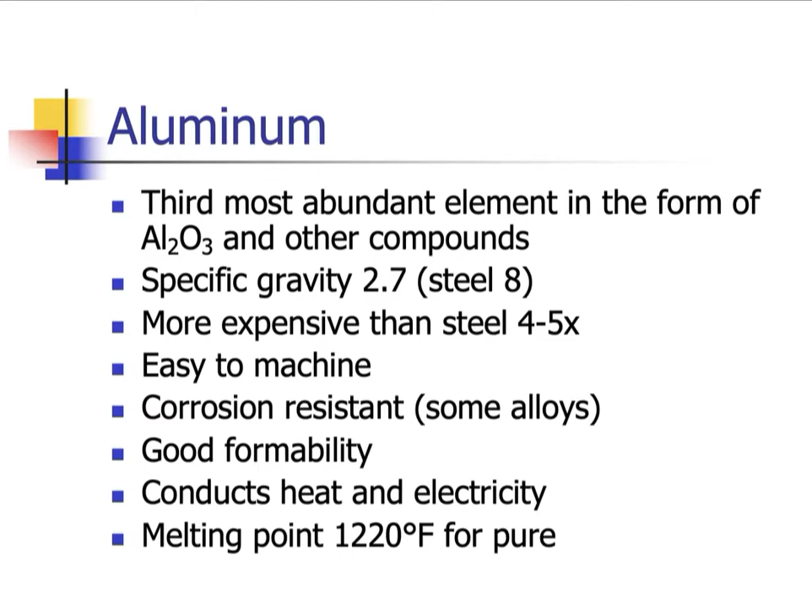Aluminum has good formability, or relatively good formability, conducts heat and electricity, and its melting point is about 1220 for pure aluminum. When we're making castings, the aluminum we have in the lab, alloy 356, I believe becomes completely liquid at about 1050 degrees Fahrenheit. So it has a relatively low melting temperature compared to steel and cast irons. Steel typically pours at 2800 or so Fahrenheit, and cast irons maybe about 2300, 2400, 2500 Fahrenheit.

Okay, so let's move on. How do we get aluminum out of its ore? I'm not going to test you on the exact process, but this process is where we take the ore and purify it to pure alumina. Bauxite is the ore, and alumina is the thing we're after, because we need pure aluminum oxide for the next step, which we'll talk about in a minute.

Bauxite ore comes from Jamaica, and if you've watched one of the old James Bond movies with Sean Connery, Dr. No, they're running around in a bauxite processing facility. Oregon, Washington, Arkansas, and Australia also have lots of it. But basically we need to get it from the ground.

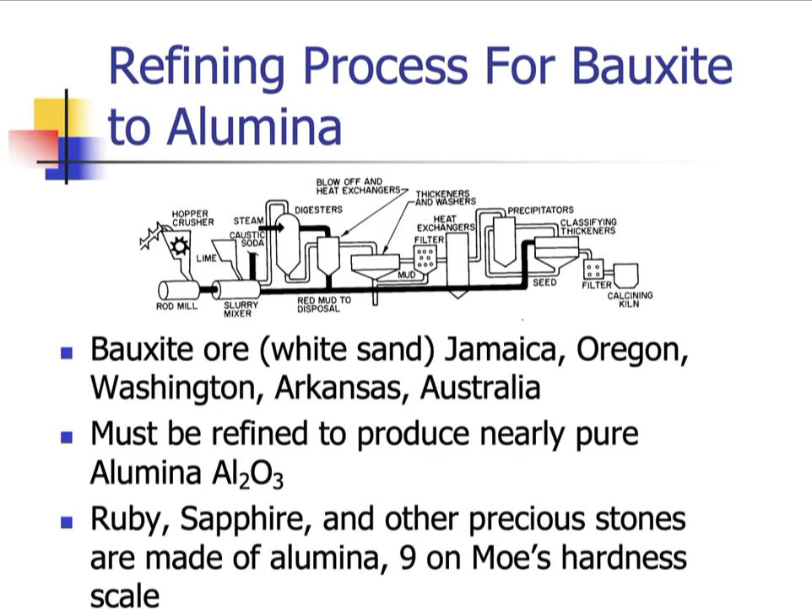One thing you may not know is that precious stones like rubies and sapphires are made out of aluminum oxide, crystalline aluminum oxide, which is 9 on the Mohs hardness scale, with 10 being diamond. So a lot of times we use aluminum oxide for sandpaper and grinding stuff, like grinding wheels.

Okay, so how do we get from alumina with an A on the end to aluminum metal? What we need to do is steal the oxygen from the aluminum. If you see here, Al2O3, we need to steal away that oxygen. So how do we do that? The problem is that aluminum oxide is one of the most stable compounds, and so in order to steal the oxygen away from it, it takes a lot of energy, and it actually took a special process.

What's kind of interesting is that Napoleon was very wealthy, and when he was in power, he had aluminum tableware. The reason was that at that point, aluminum was the most expensive metal on the planet. So back then, they didn't have the process they have now to make aluminum from alumina.

Now we have a mass production process, but it still takes a ton of energy. Not really a ton, but okay. So what do we do? If we look carefully here, we have alumina powder being added to this big furnace. I'll put a link to some videos on this process in this assignment here.

So what we're going to do is pass a current through this liquid, which is a salt. Imagine table salt, the solid white stuff you have on the table - that's sodium chloride. Aluminum fluoride is a salt called cryolite - it's sodium aluminum fluoride. So sodium aluminum fluoride is a salt.

You take that and you heat it up until it melts. Now this is above the melting temperature of aluminum, and it stays liquid because this process creates heat. But we have these things called Hall cells. Well, why do we call them Hall cells? Because a person named Hall was the American person that invented this.

Now there's another guy named Héroult over in France that invented it at the same time. So they call this the Hall-Héroult process, which over here we call it the Hall process because we don't want to give the French any kind of credit for it.

So we have the carbon anode, the positive. It reacts with the alumina and the molten cryolite. Essentially what goes on here is the cryolite is a catalyst to the reaction, and that was the key, that this molten cryolite was in there. For some reason, it will allow the alumina, the oxygen in alumina, to combine with the carbon on this anode, and it makes carbon dioxide.

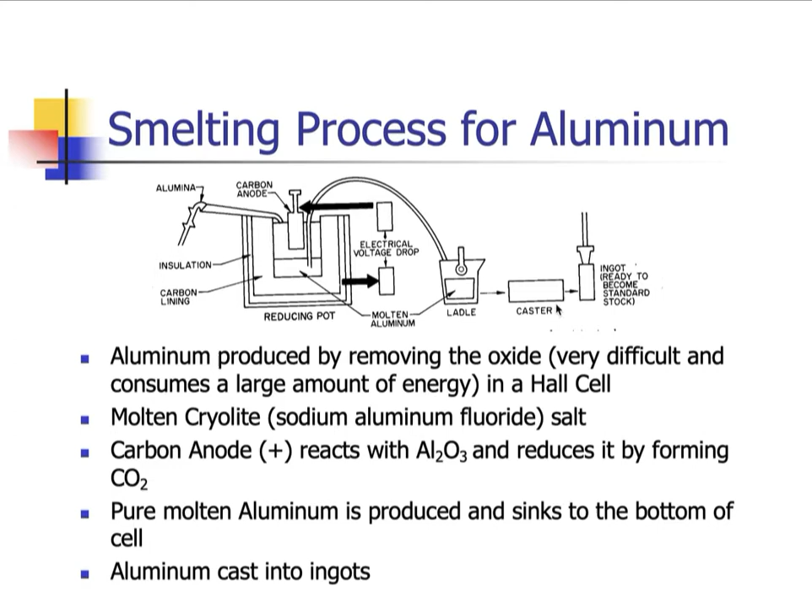Okay, so let's talk about what happens after this now. So now we have an ingot - we've cast it into an ingot of some sort in this casting machine, and we'll see that in the video as well. So what happens now? This is called, sometimes they call it virgin metal or virgin aluminum, where it doesn't have any impurities in it yet.

So when we're recycling metals, the big risk is that the recycled materials you're bringing in are not of the same composition as what you want. So that's a problem - how do we get around that? Well, we sort really well at the junkyard. When you take aluminum into the junkyard, that's why the person there is real picky about what you have in your bucket - it needs to be all the same type of material, or they'll sort it out, or call it mixed and sort it out later on.

So we don't want contaminants. A contaminant might be - if we're trying to make the 356 alloy that we use in our casting portion of this class, that has some silicon and some magnesium in it, very specific amounts. If we have some copper contamination, or too much magnesium, or manganese, or some other element in there that's detrimental - iron is a big one. If you had a bunch of iron in there, it will make the mechanical properties much lower than they would normally be.

So most of the time we're interested in making sure we have a high strength material. So the virgin material goes in, and that can dilute out some of those non-desirable elements.

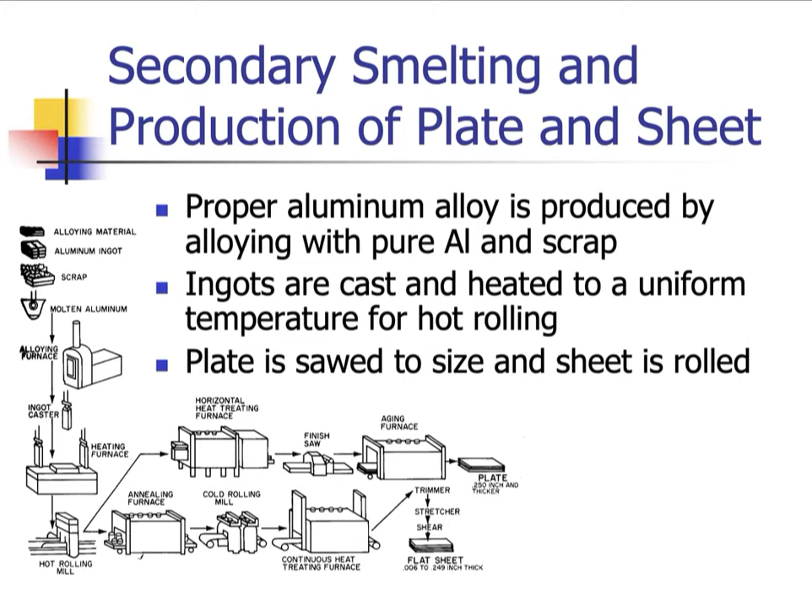So we have aluminum alloys being produced in a furnace. The ingots are cast, heated uniformly, and then rolled hot, and then we take it down to whatever dimensions we need at that point. This is mostly for flat product, for flat plate and sheet. If we're trying to make other shapes, again, we'll usually make them by extrusion.

Okay, so how do we designate aluminum alloys? You may have had some experience with this before. If you're into cars or something like that, you might see that a really high-end part might be a 6000 series, like 6061 or something like that. Each one of these alloy designations would be either for pure aluminum, copper, manganese, silicon — all these different alloying elements are the primary alloying elements. Now, as we go up this list, the 7000 series is the strongest, okay?

But these are used for different things. The 3000 series would be like your diamond plate, the real shiny stuff that you weld bumpers out of, or really nice toolboxes. The 2000 series is very strong, but it's not very corrosion resistant. We don't use it much anymore.

Like the old World War II airplanes, these were usually a 2000 series. But if we have some real high strength applications, we might put this 2000 series in there. We just got to make sure that we keep it from corroding in different ways.

If I'm making wires to conduct electricity, or maybe I want to make a heat exchanger, I might make it out of a 1000 series, which is nearly pure aluminum. And then 4000 I don't see much. The 5000 series is usually stuff for like shipbuilding. So if you're going to make a hull out of an alloy, it might be a 5000 series.

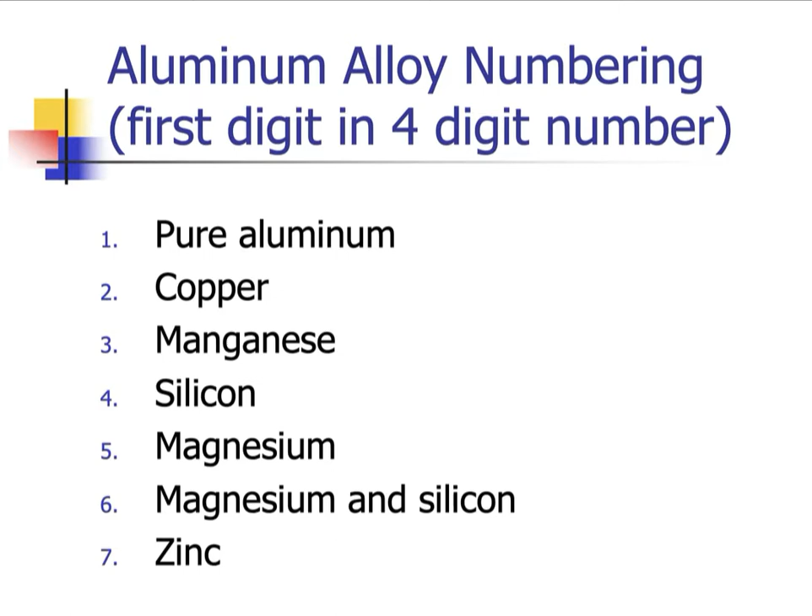Most of these alloys are heat treated, but not all of them. This 5000 series is not heat treated in order to get its maximum properties, whereas most of the other ones are. The pure aluminum really can't be strengthened much except by cold working. Remember that when we cold work something, we increase the mechanical properties slightly.

So here's some typical alloys of aluminum. 1100 is pure aluminum. The 2024 would be like a structural aluminum that you would use for high strength applications. But the 6061 is pretty strong, a good all-around alloy. We can weld it. It's got high tensile strength.

It's pretty corrosion resistant. It does need to be heat treated in order to get that high tensile strength. And so if you're going to weld it, you got to weld it first and then heat treat it.

And the 7000 series is the highest strength stuff. Aircraft, a lot of components in the aircraft. Usually they make a big block of it and machine the components out of it. It's very wasteful, but it's one of the ways to do things. That's why our airplanes cost so much.

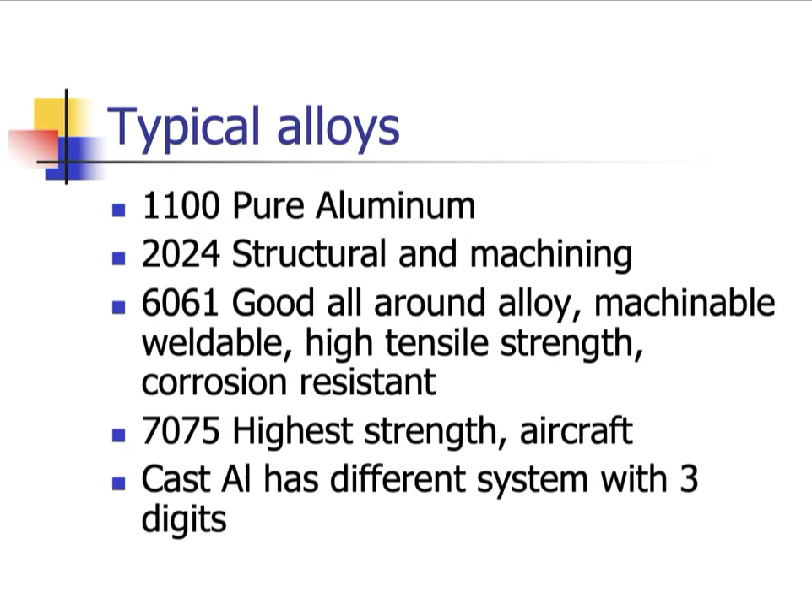And then the cast aluminum alloys have a 3-digit system, and 356 again is the alloy we use, and that is like the 6061 in that it has silicon and magnesium.

Okay, so when you buy aluminum, you have to say, well, I want this type of aluminum, the 6000, let's say 6061, but then what kind of condition? Remember that the history of the metal is very important. So what kind of condition do you want that metal to be in when you get it? You pretty much want it to be in a high strength one, typically, if you're going to machine it or do something like that.

But if we wanted to form it, or forge it, or do something with it, maybe we want to get it in the annealed condition. Annealed means softened. So if we look at this chart here, F is as fabricated. So the 6061 would have a dash, and then some letters after it. T6, solution heat treated and artificially aged. That's typically what you'll get. 6061 T6. But if you saw something like 6061-O, it means it's annealed, and it says for wrought alloys only.

Wrought means that's rolled or formed, whereas cast is a different thing. Wrought would mean it's cast first and then rolled or something else been done to it. So if it would be 6061-O, then we would know it is definitely annealed. H stands for strain hardened, again for wrought alloys only. This means you've taken the thing and put it through a rolling mill or something like that while it was cold, and then you get it partially strain hardened. So there's a bunch of different designations. Just remember, H stands for strain hardened, and T stands for thermally treated. You might think H would stand for heat treated, but it doesn't—it stands for strain hardened. So there's a bunch of different things, but just remember the T6 one is solution treated and artificially aged. What does that mean, actually?

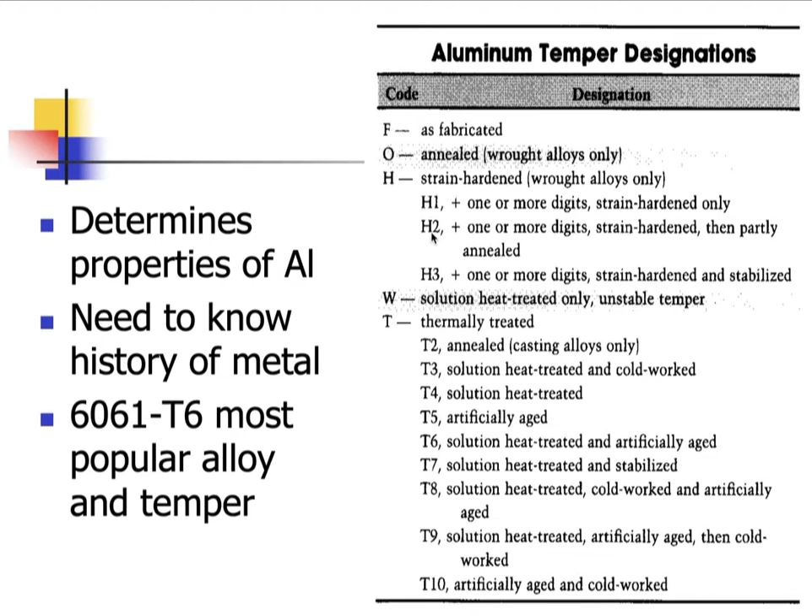So your job may be to be kind of the detective and figure out what's going on, because many of you end up as process engineers, and that's kind of what a process engineer does. Okay, so kind of know some of these, like T6 is important. Know that H is strain hardened, O is annealed or something like that. Those would be good things to know.

Okay, so now we talked about aluminum, and aluminum is very important. I would say you have cast iron and steels being the most prevalent, and then we see a lot of aluminum now on cars, trying to lighten the cars. And it kind of annoys me when they say lightweight alloy. Well, it's got a lower density, but that's not what we're talking about. We're talking about the strength to weight ratio. So how strong is it for how much material I have to use?

And some aluminums do beat some steels in the strength to weight ratio. And some steels beat many aluminums in the strength to weight ratio. So both of those materials are competing. The problem is that aluminum is more expensive. It's also a problem if you want to use it on your car, because when you put aluminum next to iron, you get galvanic corrosion. Okay, so that means that the two metals kind of form a battery if you have liquids around, so we have to keep the metals separated from each other. Well, that's kind of a pain.

My wife is a lifesaver. She actually works at a life-saving station here in Madison. She drives a 31-foot motorboat around. They look over the lake, and if someone's in trouble, they go out with this 31-foot motorboat. They just bought a brand new one, and it's made out of aluminum.

And there are some fittings that they put onto the aluminum hull that were, I think, stainless steel, and there was corrosion happening all around where those fittings were connected to the boat, because those two dissimilar metals were creating galvanic corrosion. So what they should have done is put little pieces of plastic in the holes where they go through the hull, so that we don't have that electrical contact between the two materials. So that can be a problem, especially in salt water, and this is even a freshwater situation where they were having major corrosion after just a few weeks of using the boat.

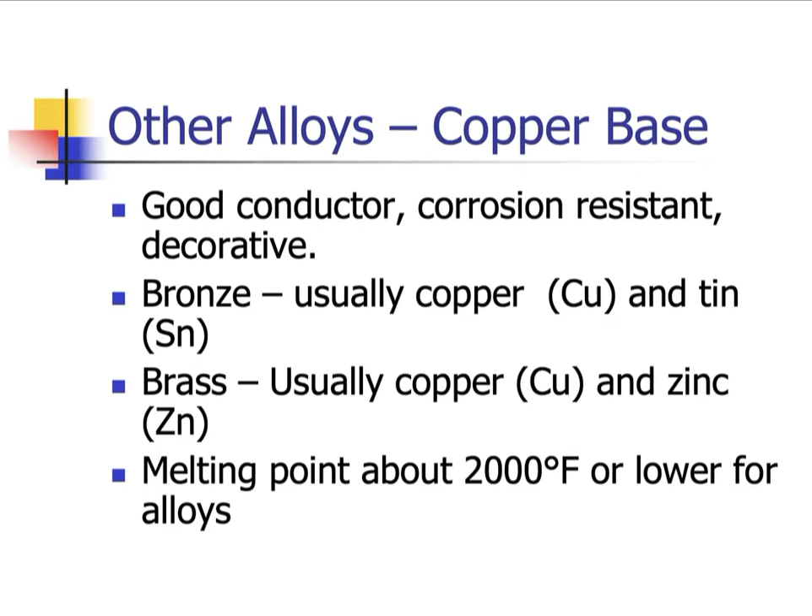Okay. So here's some examples of brass. These are brass cartridges, formed to that shape. These are machined. They probably extrude the brass, and then they machine it. And then here is a casting of some sort. So this could be a die casting, where I actually use a metal mold, because you can make lots and lots of parts off of one mold then. Okay.

So how do you know it's brass? Well, it's usually a little bit lighter, like a more silvery, I guess, or a lighter color, not as copper colored. But there's a lot of different alloys. Now these ones, cartridge brass is 70% copper, 30% zinc, somewhere around there. Okay.

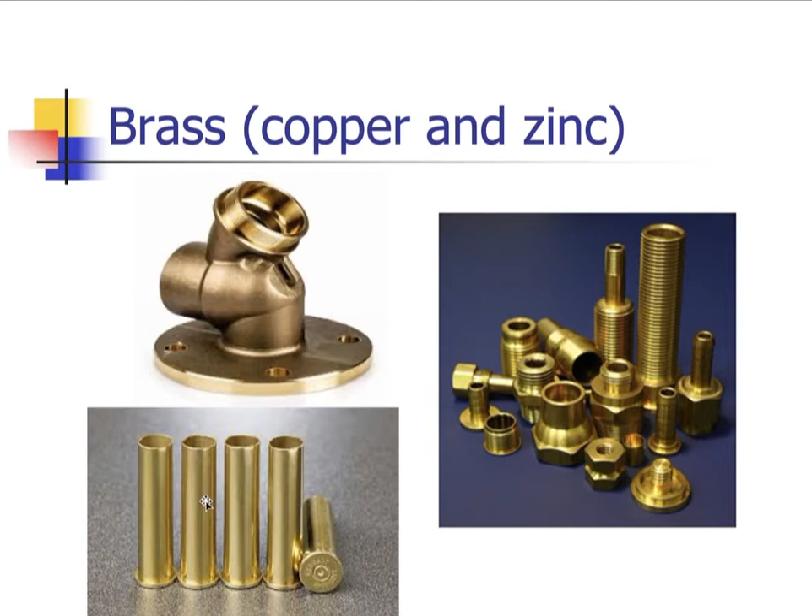Bronze, it's copper and tin. You can see it's a little bit more red, typically, but some bronzes can be the same color as brasses, depending on the amount of different elements in there. But again, copper and tin. Bells are one of the few purely copper tin alloys. So bells are 20% tin, 80% copper. And then here we have some bronze bushings, which tend to be maybe like 10% tin. So there's certain alloys that you use bronze for.

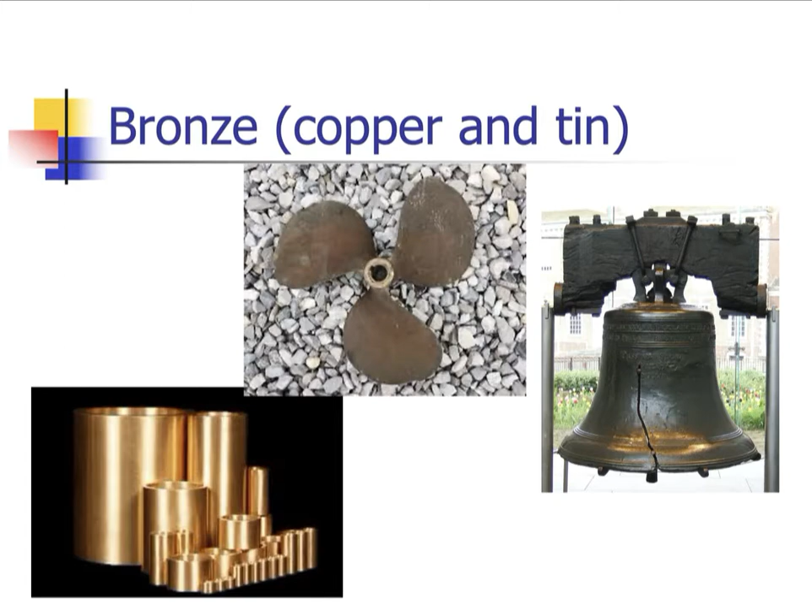One of them might be these little bushings that go in motors and stuff like that. On your transmission, the pilot bearing, the older cars had these bronze bushings, and they call them Oilite bushings. It's not a casting, it's particles of bronze that are compressed together, kind of a porous bronze, and they impregnate it with oil under high pressure, so they call it an Oilite bushing. So it's actually got oil in the bronze, and it's actually a very hard material too.

So my son's Jeep had a problem, and the nose of the transmission, the pilot, was scored, so we ground the surface, but it was a non-standard size, so we machined a bronze bushing to go in there for the pilot bearing instead of a roller bearing, and it's still working fine.

Okay, so here is an example of where there's exceptions to the rule. Leaded red brass. This is what used to be used for almost every faucet in this country, and just about anything that touched drinking water. Now, you might say, well, why would you put lead in it? Well, that's the problem right now. They're trying to get rid of this lead because small amounts of it leach out into the water.

Why would we put lead in it? Well, a bunch of reasons. Lead is awesome at plugging up the last areas to cool in the casting. Otherwise the casting may be porous and it will leak. So the lead plugs the holes and it doesn't leak. Now I want you to also notice that it is 85 copper, 5 lead, 5 zinc, and 5 tin. So is this brass or bronze? It has the same amount of tin and zinc in it.

Well, for some reason they call it leaded red brass. Okay, so not sure how they came up with that, but it's called 85-5-5-5 because 85, 5, 5, and 5. So now what they're doing is they're replacing this lead with some bismuth, but it's not as easy to cast because the lead doesn't anymore plug up all those little holes, and we get more leaking castings. So the people that cast these valves now have to be more careful about how they do their casting operations.

A.Y. McDonald right in Dubuque nearby, we have a couple of former students working there. One just got a job there recently, actually 2 of them. And they switched over to non-leaded about 10 years ago, and they had a lot of problems. They had to buy some software that models what happens when the metal cools, because making leaded red brass castings is super easy. Making unleaded ones is not. Okay, so that's a little side deal.

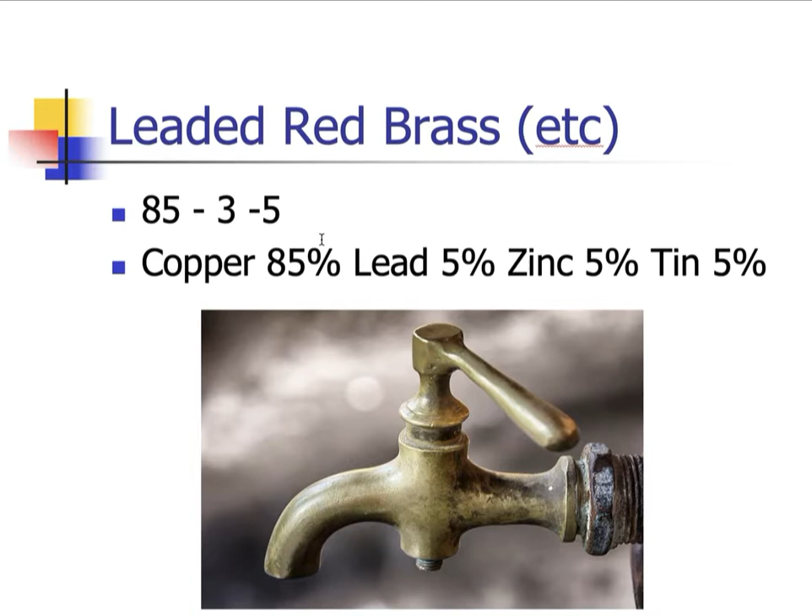So pretty much any faucet that you have is some variant of this in the old days, and then they have some new ones out now that have much higher zinc contents and a bunch of proprietary ones now that people are using. They have no lead in them.

Okay, what temperature do other metals melt at? Okay, so solder, 50-50 solder, we're talking 400 Fahrenheit. Pewter, 420. In fact, this is kind of an interesting thing. I want to do some heat treatment, and I'm going to use pewter, which melts at 420, and some types of pewter actually lower than that. So I actually want to quench knives into pewter or tin, which melts at like 450. Okay? Then Babbitt, some of these we're going to talk about what the heck they are.

Lead, 621. Zinc, magnesium, 1200. Aluminum, 1200. Okay, bronze, 1675. Okay, which bronze? I don't know. Brass, 1700. Silver, 1700. Okay, gold, we're getting up to 2000 here. Cast iron, 2200. Beryllium 2323. Now beryllium is a really light material. We're going to talk about that too. It's like aluminum, except for the fact that it's poisonous and really expensive.

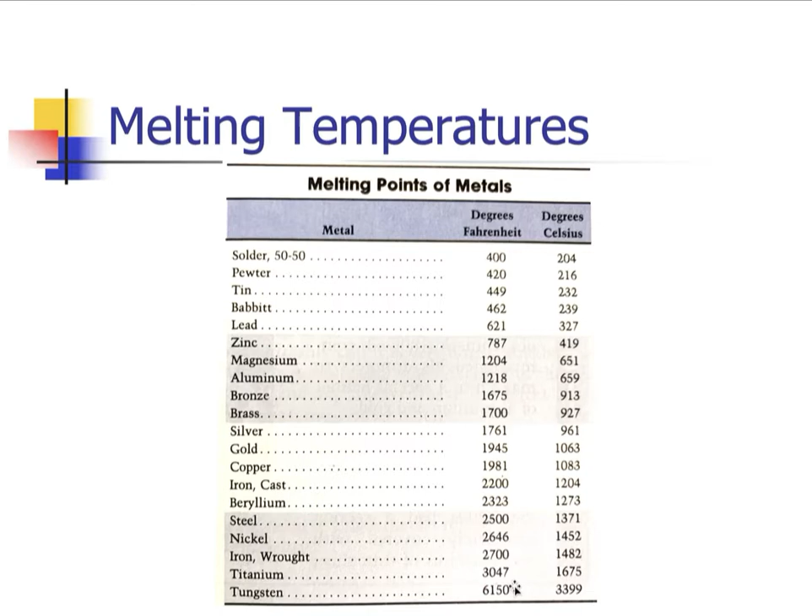Okay, steel, 2,500. More like 2,700. Nickel, wrought iron, 2,700. Titanium, 3,000. Wow, that's really hot. Tungsten, 6,000. Okay, so we have to deal with these temperatures. We don't have anything that we can melt tungsten in that won't melt also. Okay, so tungsten is a higher melting temperature than most things we have that we can melt in.

Aluminum oxide is really good refractory. In other words, it's like a ceramic that we can melt metal in, right? And we have a furnace that we melt metal in that is, I think it's 95% alumina lining. It goes to about 3,200 degrees. So you can see that we couldn't melt titanium in it. The other thing is that titanium will steal the oxygen away from the aluminum oxide, and we'll have aluminum and titanium dioxide, because titanium is more stable than aluminum is.

So let's talk about these other materials. Okay, Babbitt. Babbitt's pretty cool stuff. It's the old-fashioned bearing material. So if you have really old machine tools or really old saws or something like that, they'll have Babbitt bearings. If you use steam engines or any really old car engines, they'll have Babbitt bearings. It's a low-temperature material that's cast into a shape and then machined to its final dimensions.

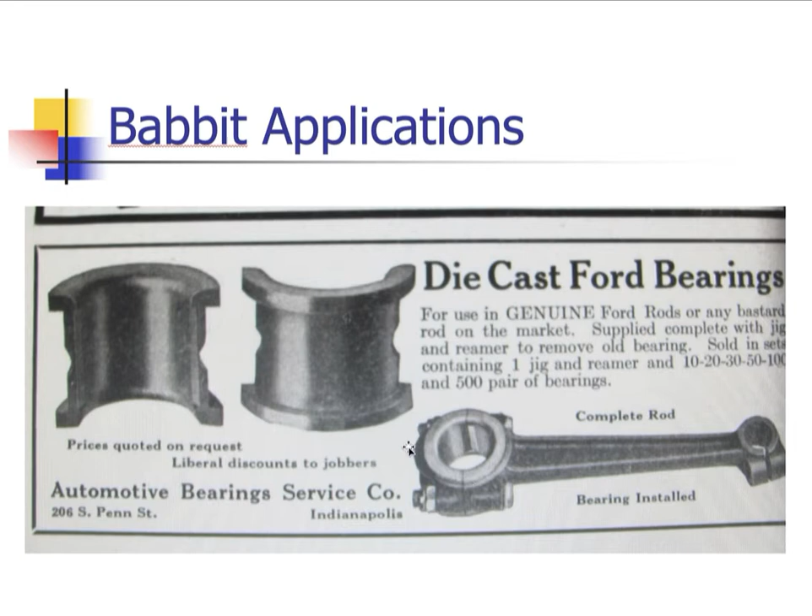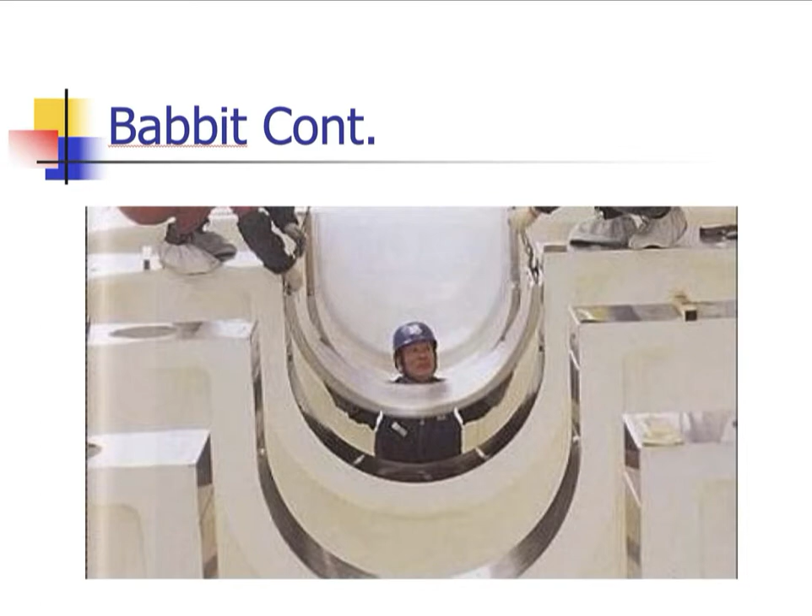So Babbitt, I've actually made Babbitt bearings for my buddy's MG. He's got a 1931 MG that he races, and so we've actually cast. There's a steel liner, so we actually cast a Babbitt bearing inside of it. And what you do, it's kind of like solder because it's got tin and some other materials in it.

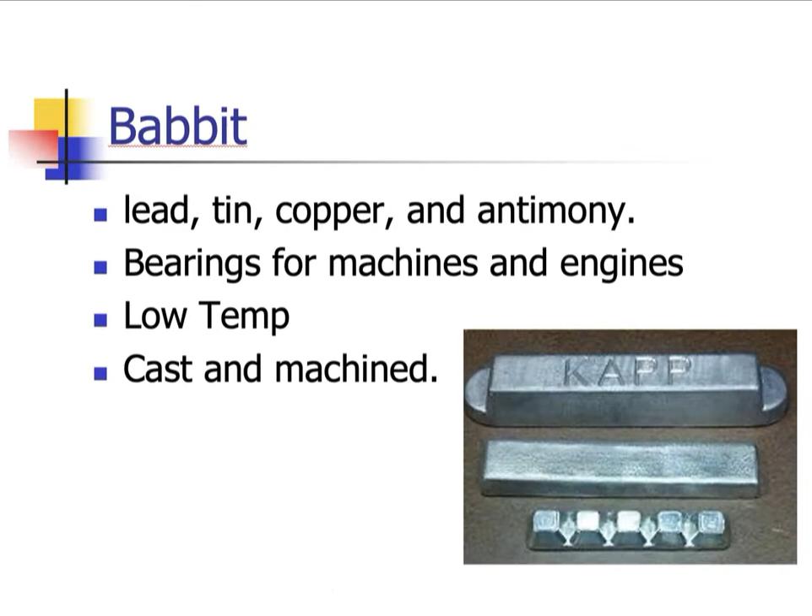I never really said what's in it, but it's lead, tin, copper, antimony. It's used at very low temperatures, and you have these mixtures. There are different kinds you can buy, and the idea is to get them to stick to the steel. Some of them actually have removable ones, so you can slide it in there. So what you do is cast it, but you have to get it fluxed really well so you get a metallurgical bond, almost like it's soldered to that steel bushing. So it's really tricky to do. You have to tin it, get a coating of tin on the surface, and then cast it.

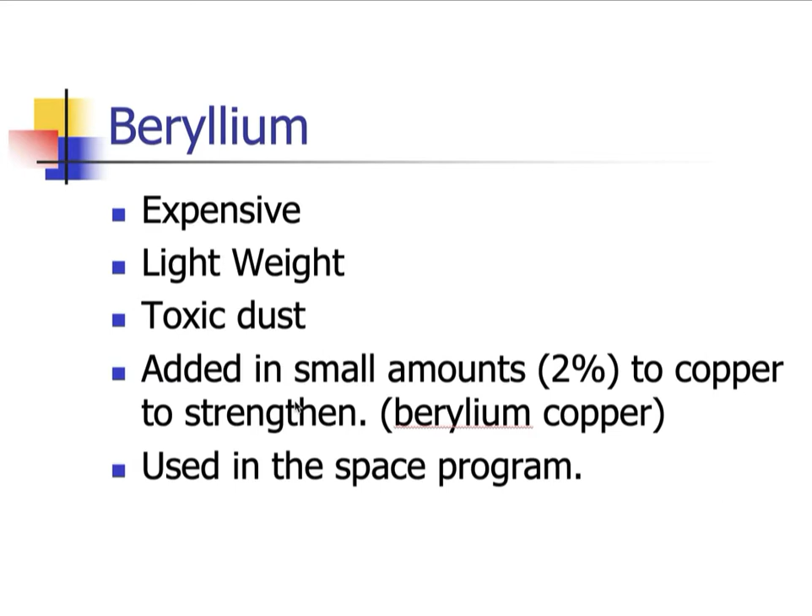Okay, so beryllium. This is cool stuff. It was used for the space program. Very expensive, lightweight, melts at like 2,000 something degrees. They are starting to cast this to some extent, but the dust is toxic, and you don't want to eat it either. If you look at where it is on the periodic table, it's right next to lithium, and it's lighter than magnesium. So this is really light stuff, and it's very strong. So why don't we use it more? Well, it's expensive and it's poisonous.

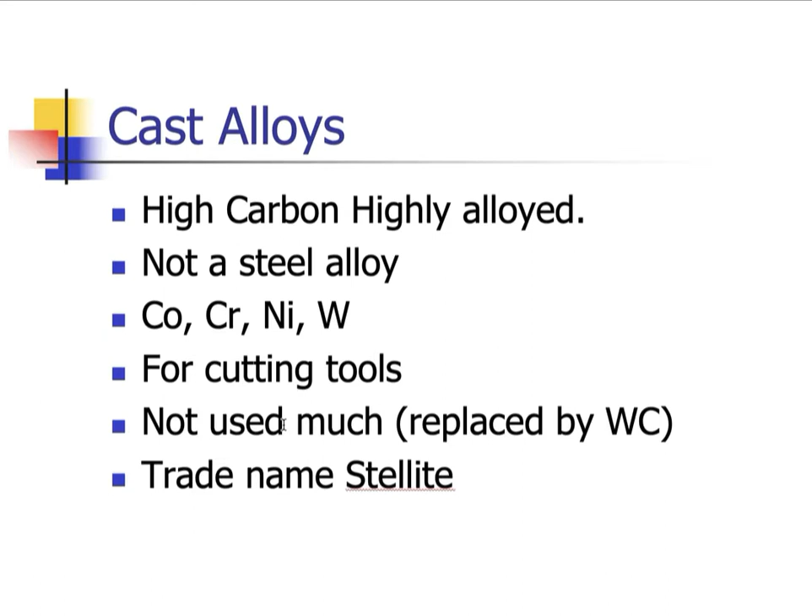In your book, it talks about these cast alloys, and I was trying to come up with some applications of this because it's not used all that much anymore. But in the old days, before they had cemented tungsten carbide cutting tools, the cast alloys were basically certain elements, like cobalt, chrome, and high amounts of all these things, and it's not a steel-based alloy. So primarily each one would be like 20% of each one of these elements. I don't know if I have a composition on them, but they have trade names like Stellite. It's not used much anymore, but we still, once in a while, will use it.

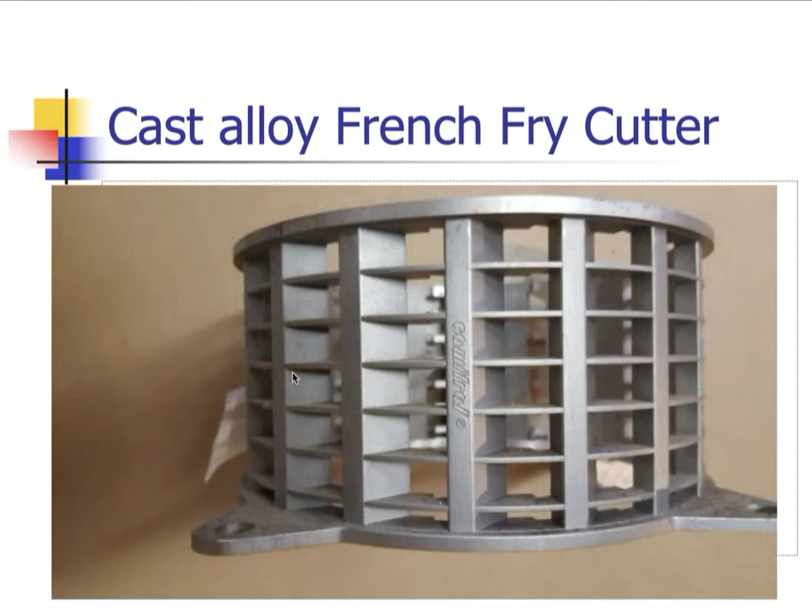So, what about gold? Gold is pretty cool stuff. Very beautiful in color, and it's very malleable - we can keep hammering it to make almost an atomic layer of metal. They use it for gold foil, things like that. It's great for, I don't know, they used it on the face shields for astronauts. It doesn't corrode. Like silver and other elements, it's found naturally in nature because it's so corrosion resistant - it basically doesn't corrode at all. It can be alloyed with copper - if you alloy it with copper, you get rose gold. If you do it with nickel, you get white gold, and sometimes they add a little silver to it for different types of gold. So it's mostly used in jewelry and in things where you don't want corrosion, even electrical contacts. Silver has the highest conductivity, but it does oxidize, so we could have silver and then maybe gold plate it so the contacts don't oxidize.

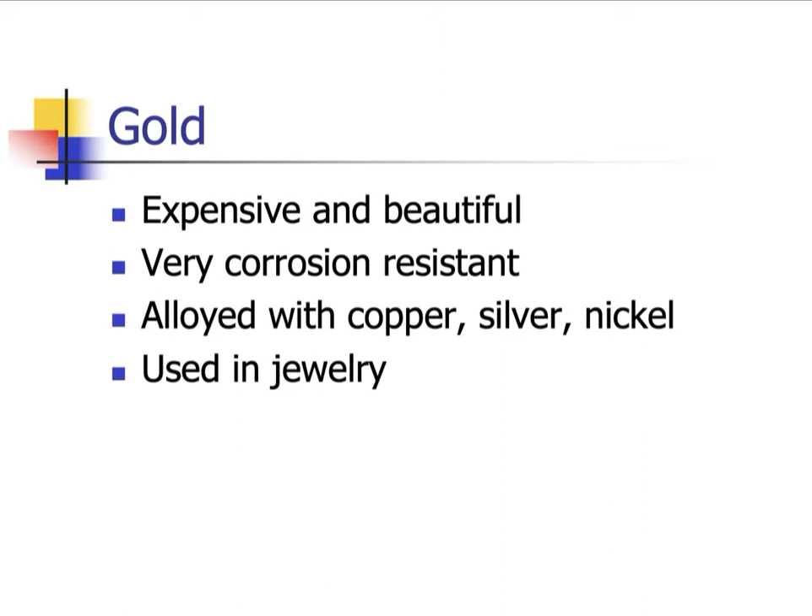What do we use lead for? It's used for lots of things, although we found out that it is toxic. I played with lead soldiers when I was a kid. I had a little lead casting set, and my mom always told me to wash my hands, but I never did. So I probably ate a lot of lead. Good thing it has never affected me. We'll see.

Lead has very high density. We use it for ballast a lot of times, in ships and things like that, down on the keels. It has a low temperature melting point, so you can pour it at low temperatures. Maybe make a steel shell and pour the lead inside of it. It's also used for batteries, all the plates in the batteries and the little knobs on them.

Lead used to be used in solder, but now they've substituted other things like bismuth in the solder. Why? Because lead was poisonous. If you're soldering pipes together in your house, you could get small amounts of lead in there, although the lead solder was much better.

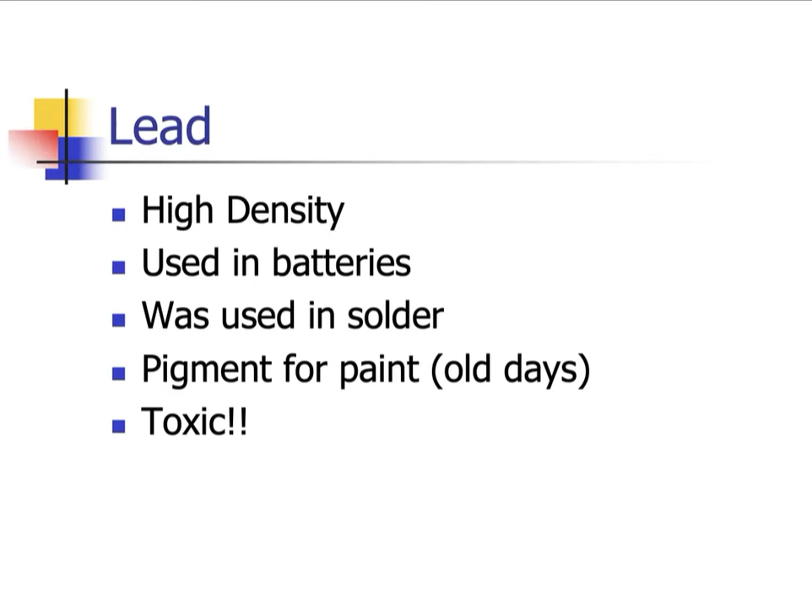So why are these kids all getting lead poisoning? Because it was in the paint. Now for white pigment in paint they use titanium dioxide instead, so we're no longer using lead. It's toxic - I don't know what the exact amounts are, but it doesn't take much lead to get lead poisoning, and for young people it's really bad. So make sure if you have kids that you pay attention to that.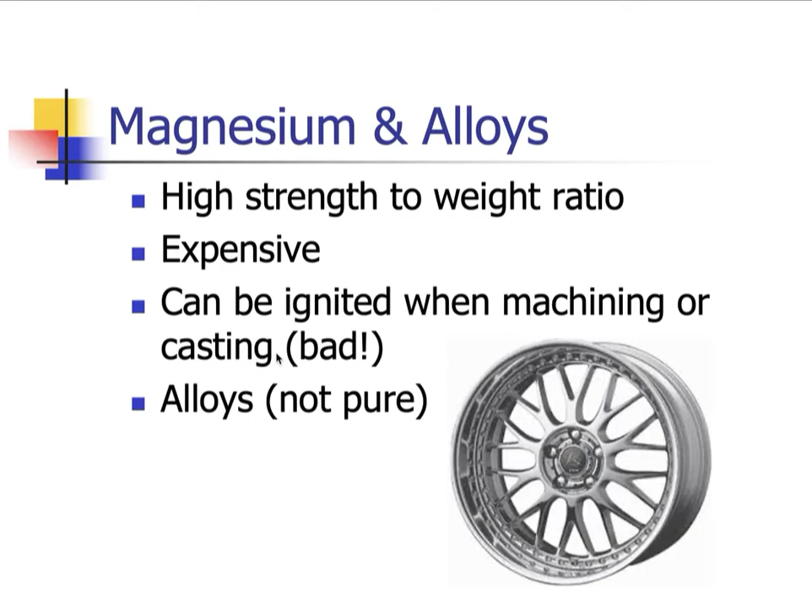But it burns at like 4,000 degrees. So you have to be really careful what you're doing, because you can't put it out. And if you put water on a magnesium fire, what happens? Now let's think about that.

H2O - magnesium likes the oxygen in water more than hydrogen does, so it steals the oxygen from the hydrogen, and now we have two fires. We have the magnesium burning more because it just stole some oxygen, and we have hydrogen, which comes off the fire and finds more oxygen outside the fire, and you've basically made two fires. So people put sand on it.

They have special foams and stuff you can put on magnesium. There's special stuff that you want to do. If you're a firefighter and you take a hose and blast a magnesium fire, you're probably going to die. Many firefighters have died from that.

Okay, nickel-based alloys. So what are these? These are really high temperature alloys we use for jet engines typically. They're super expensive, nickel is expensive. So what we mean by nickel-based is that nickel makes up more than 50% of that alloy. Okay, so it's got nickel.

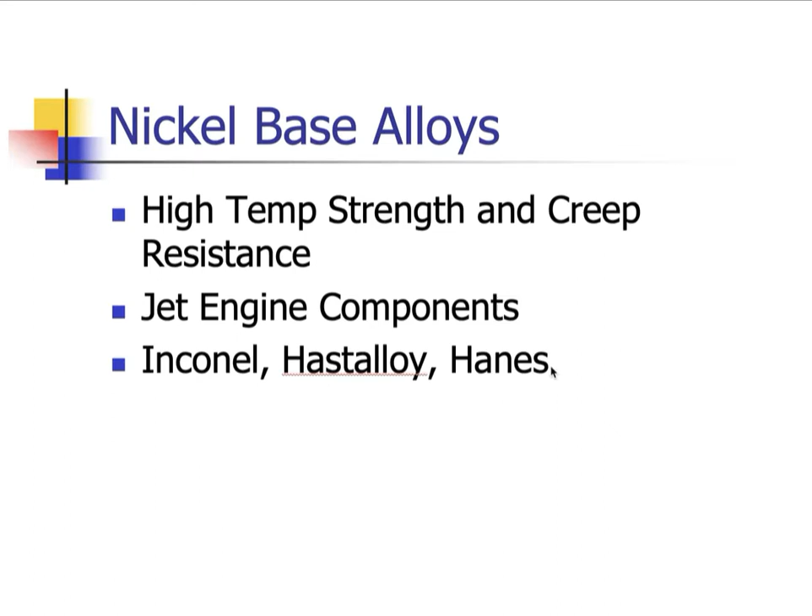Let's see what else we have. I think somewhere I talk about it, maybe not, but nickel, cobalt, really molybdenum - really expensive alloys go into this stuff. So Inconel, Hastelloy, Haynes - these are all proprietary alloys that go into parts of a jet engine.

We compress the air on the front end, we add fuel to it, and we burn it on the back end. It's almost like a combustion engine, except it's continuous instead of sporadic - a normal internal combustion engine goes through 4 strokes and then fires. This thing is firing continuously, and it's very efficient.

Okay, so many parts on that. Why are they nickel-based alloys? They call them super alloys sometimes. Why are they? Think about this - this engine turns sometimes in the neighborhood of 30,000 RPM, 40,000 RPM, really, really fast. So all the stuff in here wants to fly off, and it's at high temperatures, maybe over 1,000 degrees Fahrenheit, maybe 1,500, 1,700 degrees Fahrenheit inside here.

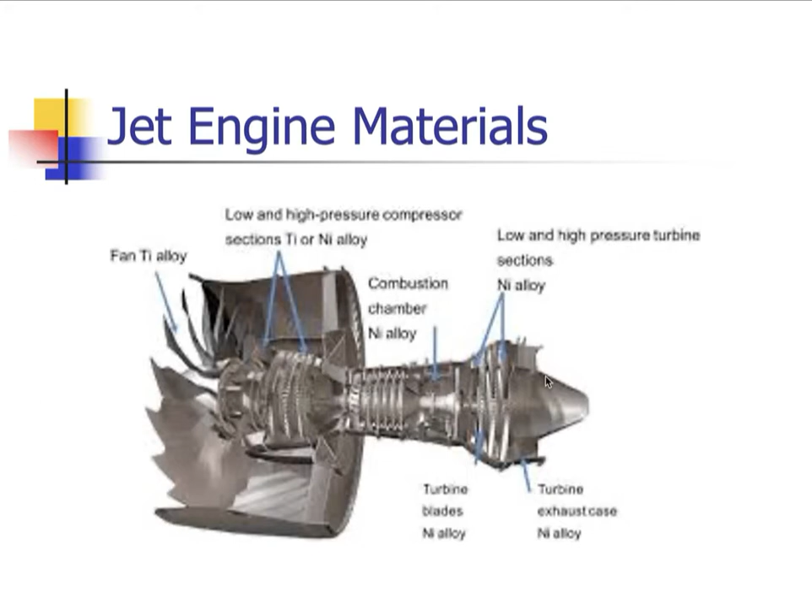Most materials at those temperatures will start to stretch - they call it creeping. If your fan has a fan shroud on it, and there's only a few thousandths of an inch of clearance around there, otherwise we could blow by, and that fan starts to get bigger in diameter, what happens? Well, it starts abrading the sides of the engine, and they're made to do that to a point. Then you have to replace the seals on it. So essentially, the turbine ring is getting bigger and bigger.

Maybe over 10,000, 20,000 hours that the airplane is flying, it's under high temperatures and high stresses in the outward direction because the thing's spinning, right? Centrifugal force wants to make it bigger, and it does get bigger. Eventually, they know that at that temperature and for 20,000 hours of flight - I don't even know what the numbers are - you have to replace that compressor or that turbine, and they're very expensive, by the way. And so that's why airplanes are so expensive - they have to go for all this routine maintenance. That's because these parts cannot withstand those temperatures for an infinite amount of time.

Also, there's corrosion inside the engine as well. It's high temperatures, you get high temperature corrosion.

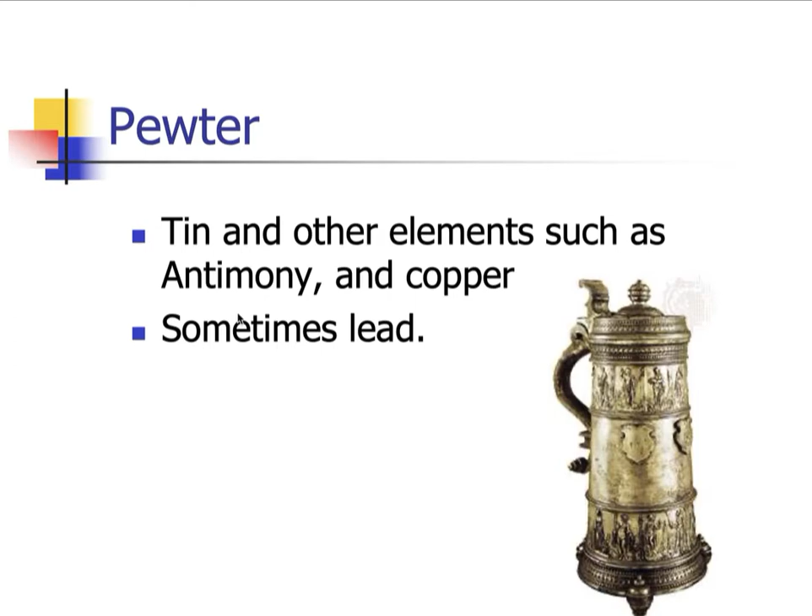By the way, a lot of this pewter stuff is made in Madison. There's a company that did all the little miniatures for Dungeons and Dragons back in the old days, and even now they make many of the Warhammer figurines, the ones that are metal, and even resin. They're a pretty cool company. They also make a lot of Disney stuff — artists will make the originals, and then they send that over to China to make all the production stuff.

Okay, silver. What are we doing with silver? Well, it's a really good conductor of electricity. It can be used in bearings — some of the best bearings are silver. Of course, they're very expensive, but it's a really good bearing material.

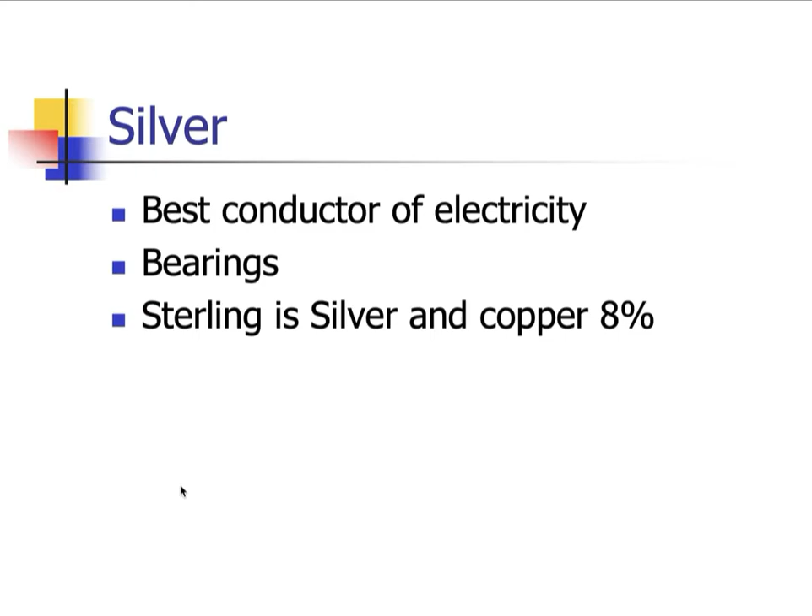Just so you know, sterling silver — if you've seen something like everyone used to have, a tea set or something like that. No one does that anymore, but maybe you got one from your grandma. Sterling silver is something like 92% silver, and the rest is copper and something else, I forget what it is. But mostly copper and silver is what sterling is.

Now, tin is a relatively high density, low melting temperature material. It's very corrosion resistant, so a lot of times we'll use it in tin cans — we coat the inside of a piece of steel with tin. Tin cans are made out of steel, remember that. They only say tin because they have a tin coating on them. It's also not used for tin foil anymore — they used to, but it's aluminum foil now. So tin is very misunderstood.

I remember I saw a big dumpster literally labeled tin, and it was full of stuff. Tin is like $12 to $15 a pound, so if that dumpster was filled with tin, I would have gone dumpster diving, but it was really filled with steel scrap. Someone who labeled it doesn't know their stuff.

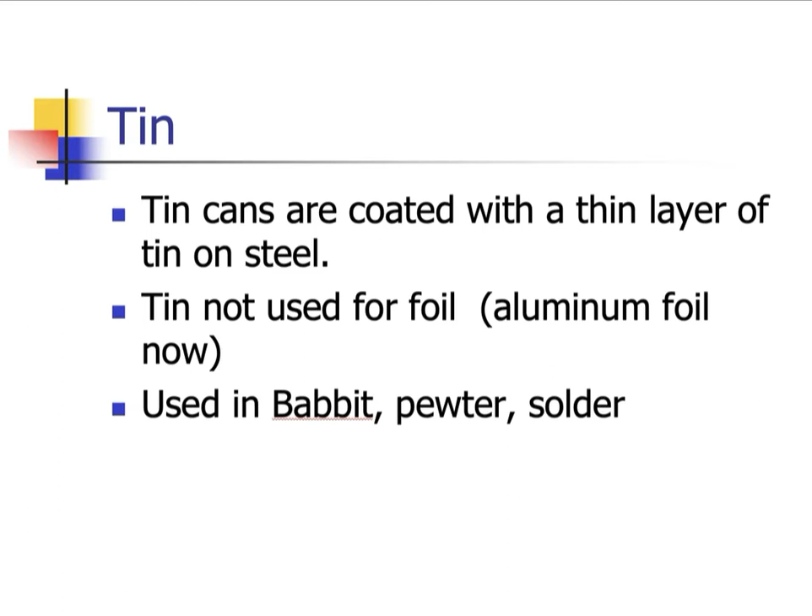It's also used in babbitt, pewter, and solder, which we just talked about. So it's a key ingredient. I just like it because it's easily usable for solder — I use it all the time. Tin is great stuff.

Okay, so titanium, why do we use titanium? Well, it's got a great strength to weight ratio, but it's very, very difficult to refine titanium. Aluminum was really valued back in the old days, but they couldn't even make titanium — they didn't have a process for doing that back then.

So how do we make titanium? It's a whole big process. We don't actually go through how you do it, but there's a place out in the desert nearby where Henry and I do our land sailing on the Mojave Desert. It's in Nevada — I'm trying to remember which side of the border it is. We went there and got a tour of it. It's at one of the old nuclear test sites, so that's kind of off to one side. But they make titanium there, and it's really an amazing process.

And now I know why titanium costs so much — it takes a huge amount of energy and effort to make titanium. But it's got a very, very high strength to weight ratio. It's 44% less dense than steel, and many of the alloys are stronger than steel as well.

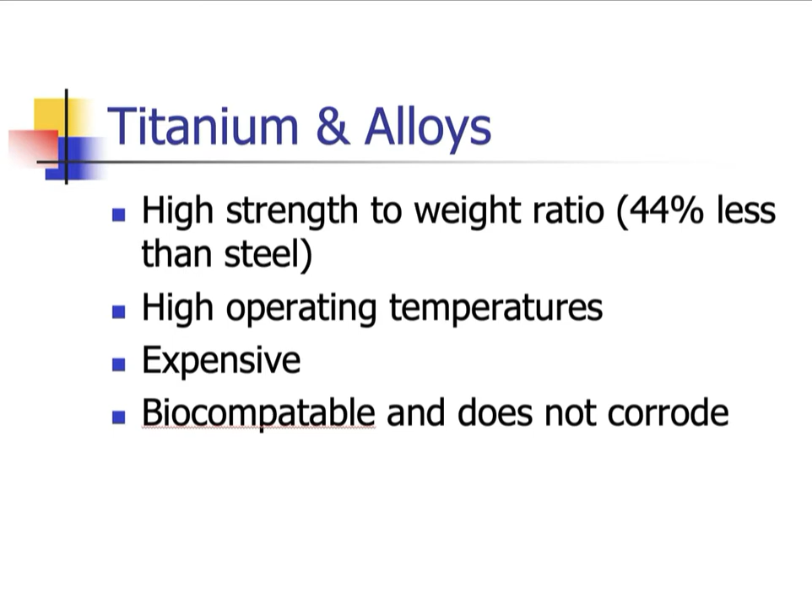It can also handle really high temperatures. You saw that 3,000 degrees was the melting temperature of titanium. When you add alloys to it, it lowers it a little bit, but you can have high operating temperatures with titanium. It's very corrosion resistant, but it's expensive, and it's biocompatible — it doesn't corrode inside your body. It's actually used a lot of times for knee and hip replacements, stuff like that.

Some titanium alloy parts actually go inside your bone, and the bone grows into that. A buddy of mine was 3D printing some of these parts, and they would 3D print like a mesh over here on where it goes into your bone, so your bone can more easily grow into it, so that you don't have to glue it in place.

What happens a lot of the times on these is you basically cut a notch in the bone here to hold that, and then they glue it in. Okay, well, if that glue fails, then they got to go back in and replace the joint. It's not a fun process.

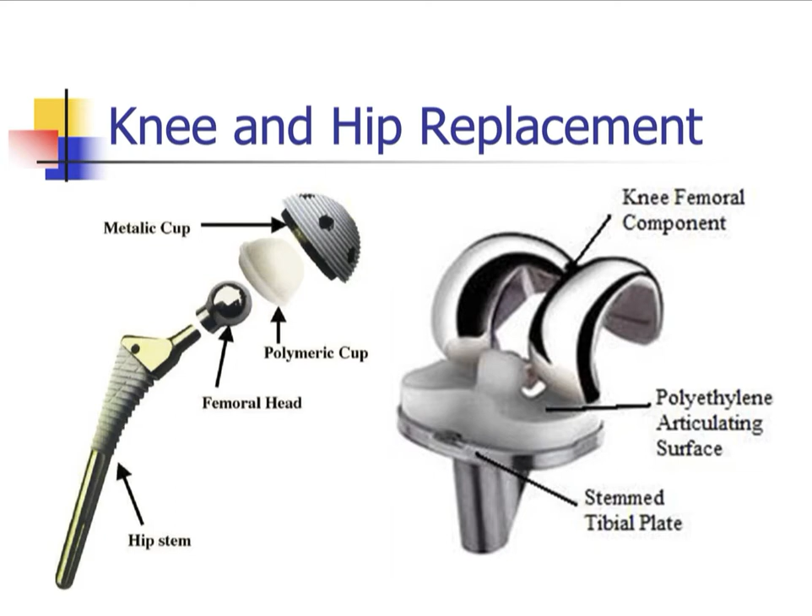Okay, so that's titanium. Very expensive. One of the things I want to tell you about titanium is that it can be easily contaminated with nitrogen, oxygen, and... forget what the other one is. But mostly nitrogen and oxygen are the two big ones you can get contamination from. So if you're welding this or something like that, if you have even parts per million of oxygen, it will get a lot stronger, but it'll get brittle. So processing can be difficult. You have to do it under a really super high vacuum.

Tungsten. What do we do with tungsten? Well, we use it for high density applications. I think they even make bullets out of tungsten, some parts of bullets, so that they're very, very high density. It's got a density like 20 or something like that. Lead's only, I forget, 12 or something like that. Way higher than lead.

Tungsten melts at like 7,000 degrees Fahrenheit. So essentially, it can withstand really, really high temperatures more than anything else. That's why we use it for filaments in the old-fashioned light bulbs, because it can withstand those high temperatures. The other thing, it has a really high modulus of elasticity. Remember at the beginning of the semester, modulus of elasticity was that slope of the stress-strain diagram. So if steel's here, aluminum's down here, tungsten's way up here. It's like 50 million psi or something like that, whereas steel is 30 and aluminum's 10.

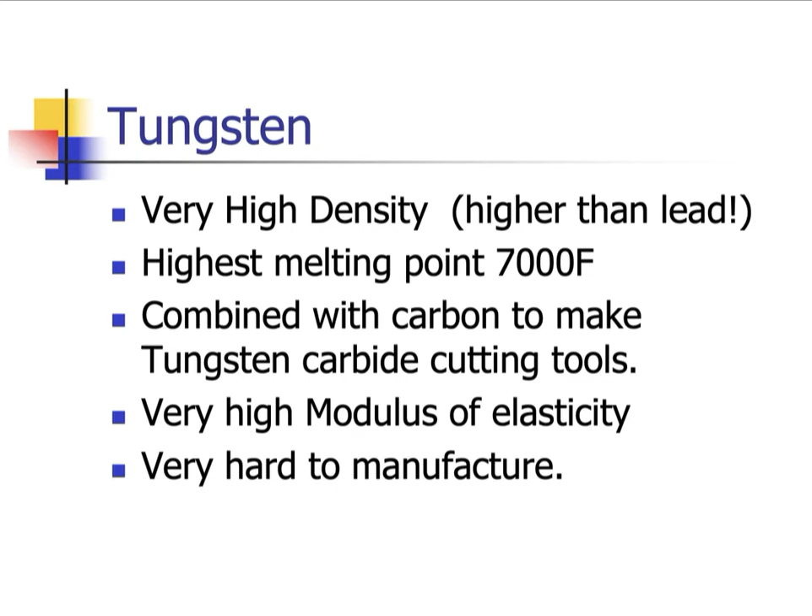I think titanium's somewhere in between steel and aluminum. It's really hard to manufacture though, because you can't melt the stuff. Usually it's done in a powdered method. It's also combined with carbon to make tungsten carbide, which is a very, very wear-resistant material, and we can combine it using powdered metallurgy. You can make little shapes of it, and that's what we're now using for, like, if you have a carbide blade for your saw for wood, that's tungsten carbide. Those little teeth are tungsten carbide.

So we use it for machine tools. Now, you're not using it when you do your screwdriver in the lab, because it's really hard to grind. You can't grind the shape out of it, and you can't make it quite as sharp. Tungsten carbide, you can't make quite as sharp as a high-speed steel tool bit. Remember, we talked about high-speed steel, that it can withstand much higher temperatures than most steels when you're machining with them.

And the last material we're going to talk about is zinc. Zinc is used in a lot of stuff. Next time you pump gas at the gas station, take the little nozzle out and look at it. You never even looked at that thing, okay? It's a bunch of castings in a tube that comes out the end. Probably the actual handle part is aluminum, but the fitting at the back where it swivels, and all of the couplings, up to the quick release mechanism. People all the time leave the gas nozzle in the side of the car and drive away, and it has this special thing on there that rips apart and keeps you from wrecking the pump.

Connections or some little structure inside there. What else? Old car trim emblems. Why? Because they're easily chrome plated and they can have a lot of detail. So like an old Mustang or a hood ornament from an old Oldsmobile or something like that. Those were all zinc die castings.

Zinc's heavy though. It has a high density, but a similar strength to aluminum. So if you can handle the weight of it, then you're okay. But the problem is most cars nowadays can't handle the weight, so they'll go with aluminum instead or some other plastic in some cases. But you can make many parts out of a die, like 1 million parts out of a die. It's very fast. It's very cheap.

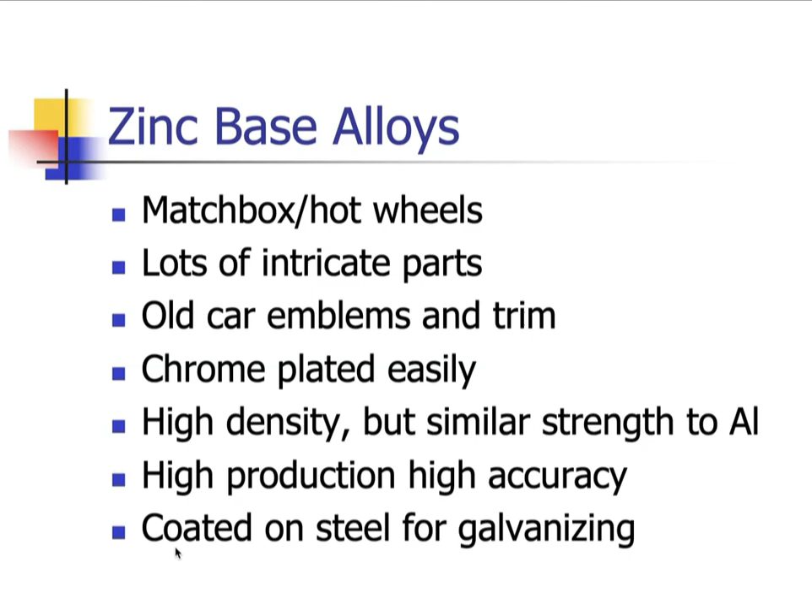It can be coated, and it can be chrome plated or whatever, but you can also use zinc to coat the steel, and it's called galvanizing. So that kind of spangle, if you look at, sometimes they're like posts, like big posts for lights for cities. You go up close to them and you can see that they have these little crystals on the outside of them. What's the deal with that?

So if we had a piece of heat-treated steel, we wouldn't want to dip it in molten zinc because it's going to get rid of the heat treatment. But for most lower strength steels, we can dip it in. In fact, they even have some kind of heat treatments you can do with the zinc that kind of anneals the steel or something like that. Yeah, that's zinc.

So, galvanizing. By the way, galvanizing can be done either as an electroplating process or a hot dip. Now, if we want to have long-term corrosion resistance for like a ship, or for your frame on your car, you want to do the hot dip one. If you're just taking a fastener, like when you buy a fastener from the hardware store, it's been electroplated in zinc. That's why it's shiny silver colored.